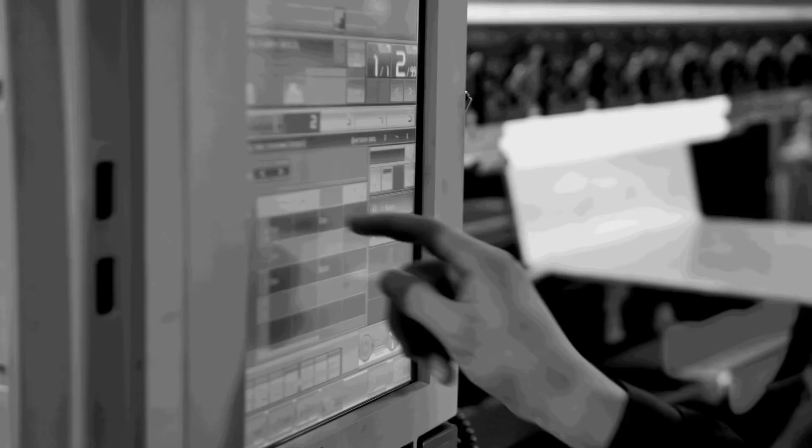Today's technical corner. If I said to you I could improve material removal rates, reduce your cycle time and reduce the number of operations, you'd be interested. Well, today we're joined by Matt Kavanagh from MSC Industrial Supplies.

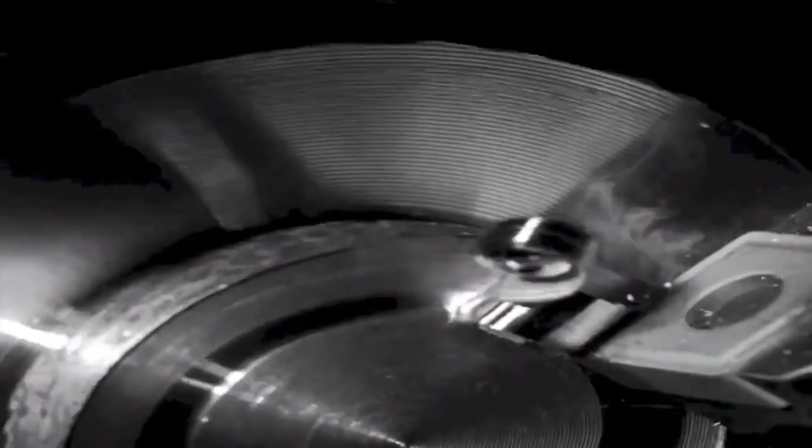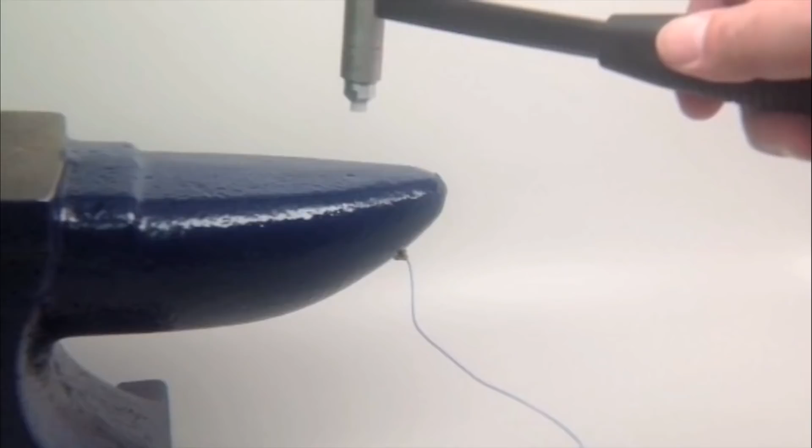We don't make milling machines, milling tools, or milling software. We just make them all mill better. Here's how. Unlike other machining operations where the cutting edge never leaves the workpiece, milling has hundreds of individual tooth impacts per second, generating forces that cause deflection and vibrations. Like this 75-pound anvil, every tool is flexible and vibrates at its own unique frequency. Why is this important? The tool point deflects and rebounds at a frequency determined by the flexibility of the tool holder and spindle. You also have a tooth impact frequency determined by the number of teeth and spindle speed.

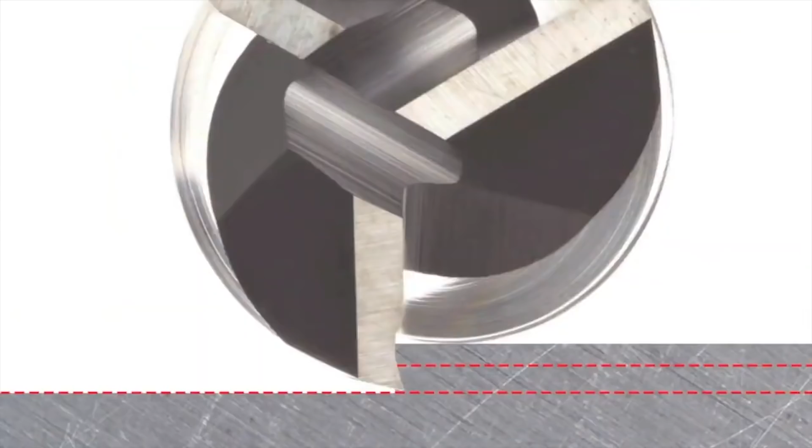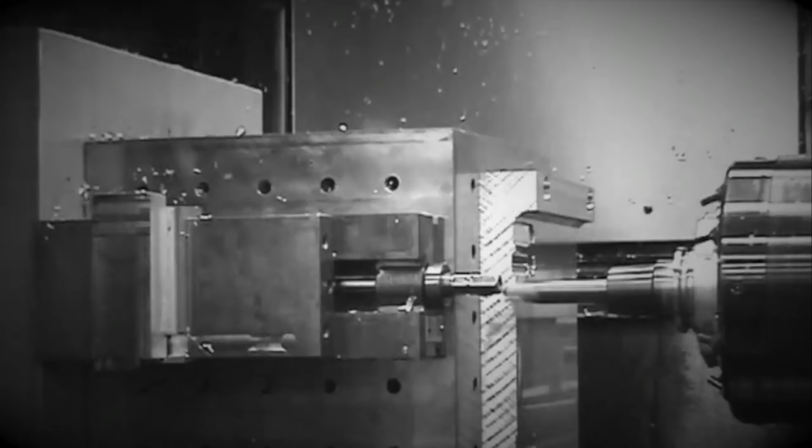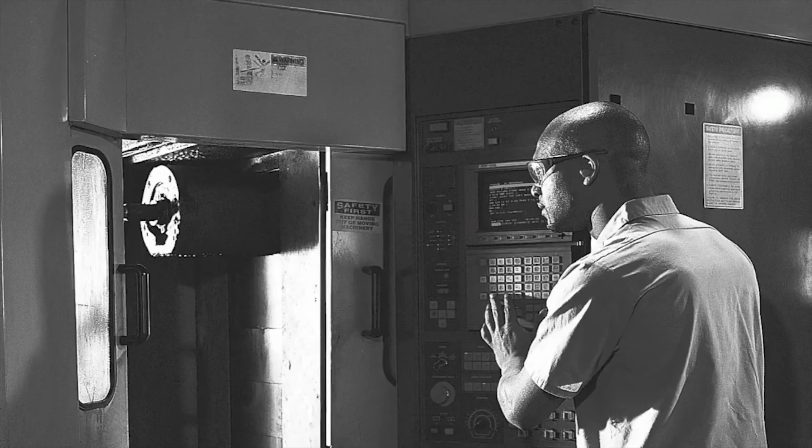You have to get the timing of these two frequencies just right. If you do, each tooth is cutting equally, so tool life, productivity and quality are maximised. If the timing is off, a tooth arrives too early, undercutting and throwing off the next tooth. If it arrives too late, exceeding the programmed chip thickness, it leads to premature tool failure, poor surface finishes and possibly scrap. This timing mismatch keeps getting worse and leads to chatter. Without knowing the tool's frequency, the common response to chatter is to slow down the spindle speed, vastly underutilising the capabilities of your machine and tooling.

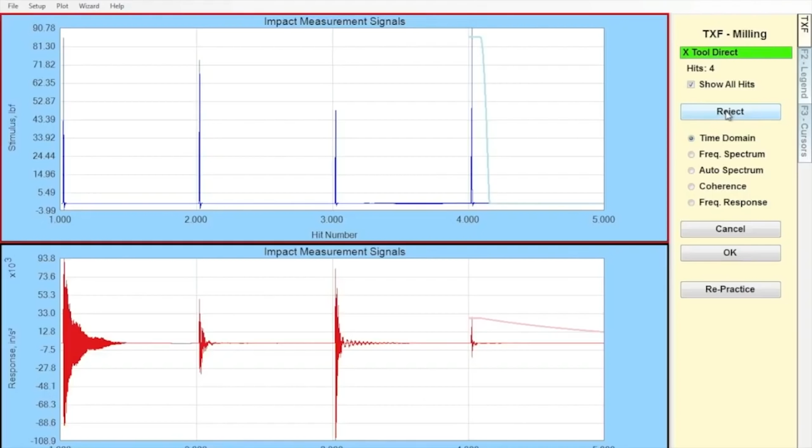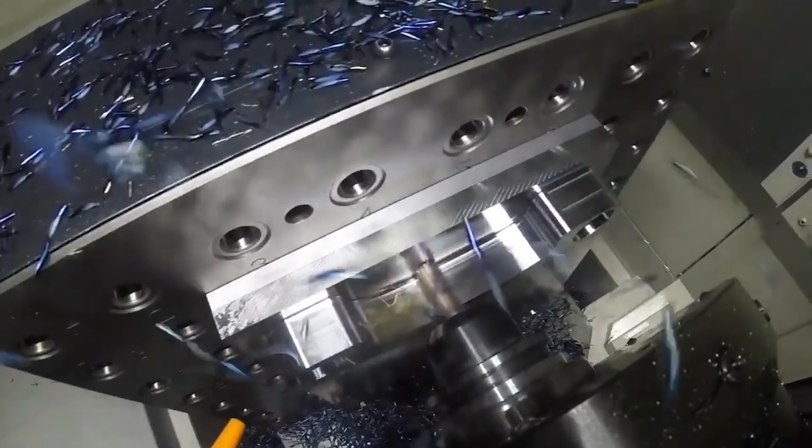As we said earlier, every different tool, tool holder, machine combination vibrates at its own unique frequency. The challenge is that there are millions of potential combinations. MSC MillMax measures the frequency of each tool and instantly generates a dashboard that calculates the precise, stable speed and feed rate, width and depth of cut for maximum performance. It also determines the best speeds for surface finish and accuracy. This patented and proven technology is in use in the world's largest manufacturers and is available exclusively from MSC's engineering team. Contact MSC today.

Wow, Matt, it's only a 2-minute video, but that is absolutely amazing. But I want to put you to the test. Have you actually got a real life example for us? Yeah, for sure. So we took this software over to a supplier, manufacturer of tooling and supplier. So when we went there, they had a piece of... I'm going to stop you there. Let's actually see the video first, shall we? Okay, yeah, let's do that.

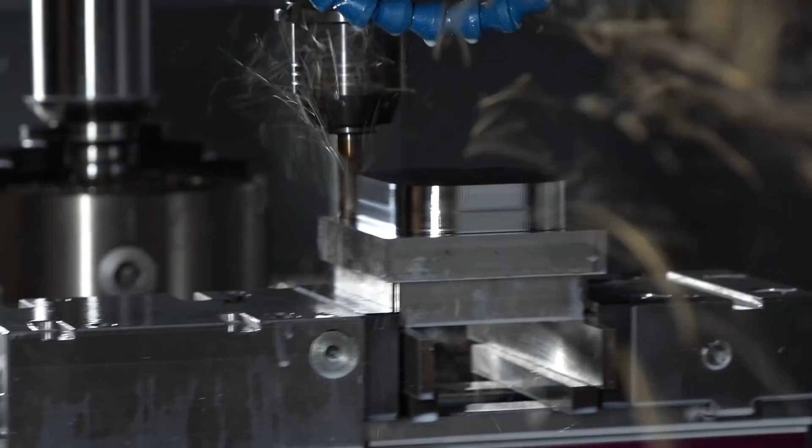So Matt, talk me through what's gone on here then, please. Yeah, so as I say, we went on site to a supplier. They helped us out with the material and the tool setup. We went in, we put all the data into the software, tapped the test, and we got over and above beyond where they'd managed their optimum performance. Bearing in mind this supplier, they use their tools, they trial and test, they have internal conversations, they work with their customers, and throughout a 2-year period the supplier got the optimized data of what they thought.

Within 15 minutes we actually gave them over and above what they thought was the optimum data, and we'd almost doubled the output of their optimum performance. So you've walked out with a big smile. They've walked out for sure. Yeah, brilliant. I mean, it was all over internally on their internal work.

Absolutely fantastic story there. So I want to take a step back then, and the start of this sort of process is sort of the bane of engineers, and that's your chatter. We've got a great example of a video after this. We'll go into that.

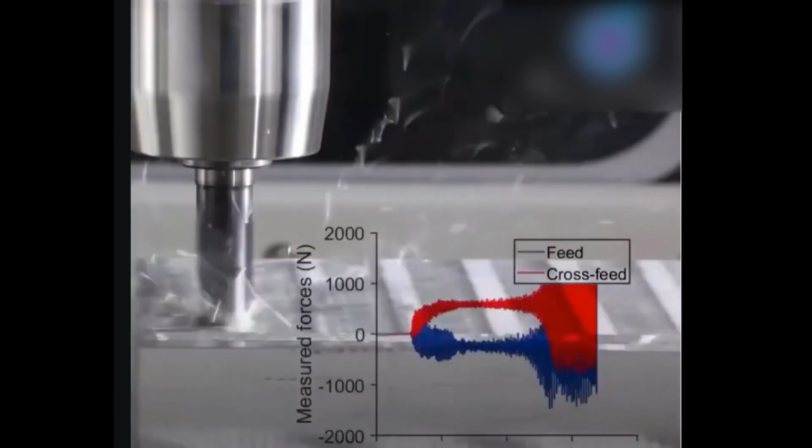Okay, tell me what's gone on here then, please, Matt. So yeah, you can hear the chatter on there audibly. What's actually happening is, crudely, the actual tool's wobbling, so it's got resonance in there, and you can hear that chatter and that movement as it's machining. And every setup has its own resonance, its own thumbprint, essentially. For sure. Okay, but we'll come to that in a little while.

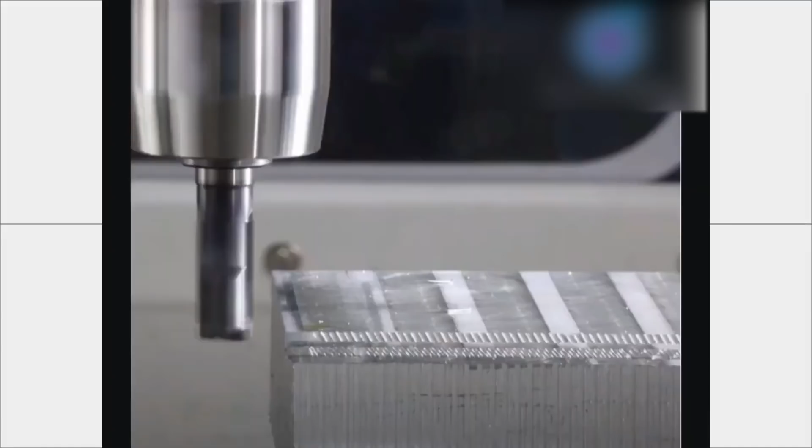So that's pre-MillMax, post-MillMax. I think this tells the whole story. So now, could you hear that? Absolutely, you couldn't hear it. I mean, that was like a knife through butter. It really was. So what's happened here though? So what we've done is we've actually found, I always refer it back to a hearing aid. It's about that person's frequency, and it's unique to them. Same characteristics here. It's the right frequency, or the stable frequency, regarding the characteristics of the actual setup.

Okay, well that ties in perfectly with what I want to cover next, which is the actual setup. So you've got here the mill. Obviously, we haven't got a machine and a spindle, but you've got the tool holder. Talk me through what's going to go on and how it ties in with the resonance. Yeah, for sure. So here we've got, let's say, a machine on concrete, or it might be on anti-vibration pads. We've got the build-up of the linear rails. We've got the spindle, and all of these elements offer a certain resonance.

When you then add the complications of the actual tool and the tool holder and the tool assembly, or any adapters, you're then building up the frequency levels a hell of a lot more than what it would be previously. So it's about then finding that unique stability, or eliminating that resonance, to be able to pinpoint where you should be machining. Okay. Eliminating the resonance or identifying the resonance? I think both, actually. Okay. So we'll see that on the dashboard.

Okay, so essentially every single setup is unique pretty much. So you've got that setup, you've got chatter occurring. I've contacted yourself at MSC, said I need you guys to come out and get the MillMax and do the tap test. So what happens? So yeah, before we even come on site, we'll have a look at some characteristics of your machine setup. So we'll want to know the machine itself. A picture tells 1,000 words of a tool setup, so that would be great.

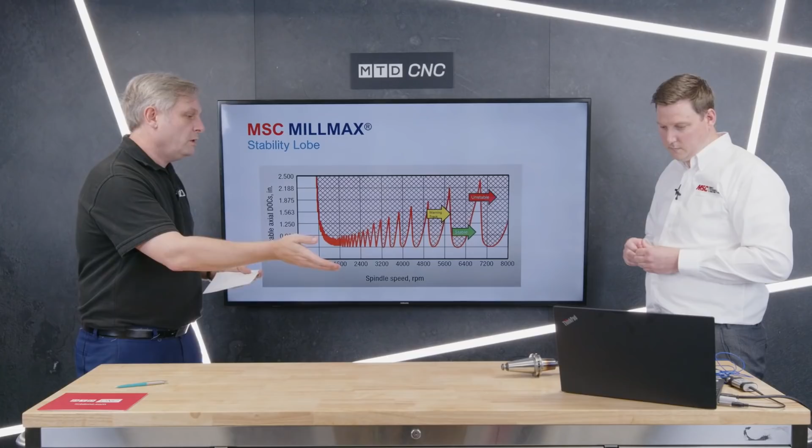Yeah, so essentially we've got the tool holder with the tool, which will be static in the machine. So it's not rotating at this point. We have a 3D vibration sensor with some jelly, very technical. Some petroleum jelly that sticks it onto the flute of the tool. That will stay there throughout the whole duration of the tap test. Okay. Obviously, the spindle still isn't rotating through the duration of the tap.

Then, whilst that 3D vibration sensor is stuck onto the tool, we have a hammer which we will tap onto the tool. No, it's not a hammer though, is it? We'll call it an accelerometer. Yeah, I've got to get that right. So we will tap the tool, and once we tap that, the software will tell us whether it's doing a double tap, you've tapped too hard, you've tapped too soft. So it is very sensitive to make sure that you get the right information back into the software.

Okay, so you're doing all this setup. I mean, you've got the data in advance, you're doing all this setup. I'm a machine shop, I need to be making components, making money. My machine shop's going to be down for the day. So no, completely incorrect there, actually, Colin. What we do, because we're doing all that back work, and because we're taking all that data, we'll input that into the software already. Right.

So we'll literally use that vibration sensor, put it onto the tool, onto a static tool, tap the actual tool itself. There's a number of taps we do in one direction on the axis. We turn it around, do the same amount of taps in the other axis in Y and X. And then once we've done that, we've got all the data, we can come away, analyse it. You could even carry on with your production, and then we can give the optimised data after, so it will eliminate the downtime. Okay, so roughly, what, 15 minutes? 15 minutes, yeah, for sure. So that's brilliant.

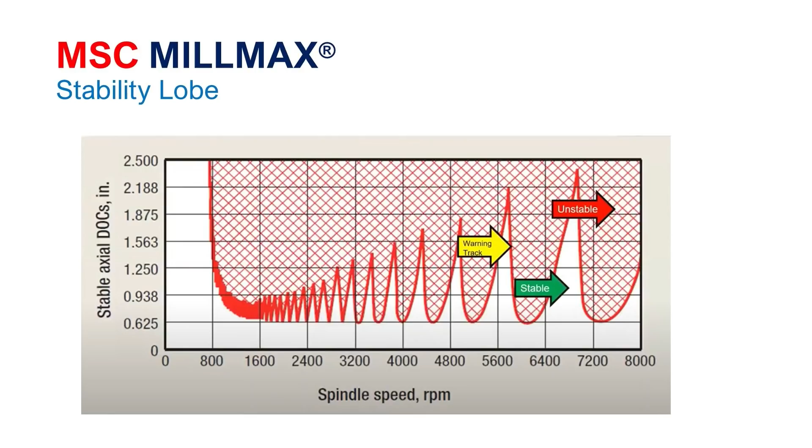Okay, so you've got the data for that setup, for that machine, the tool holder, the tooling. You've done your tap, then get the stability lobe, which you'll talk us through. Yeah, so the white parts in there are the depth of the tool that's engaging into the material. So in between these peaks and troughs, between the red and the white parts, you can see at the bottom the actual spindle RPM. And then on the other axis, you can see the depth of cut. So depth of cut here, spindle speed there, and that's individual to each machine. So it could be 12,000, 15. Yeah, it's unique to whatever max RPM the machine's got.

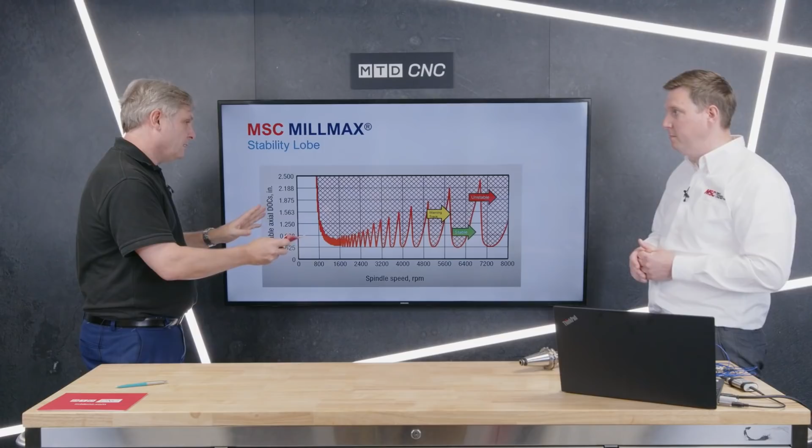And then within the white areas are the stability parts. And then you've got this thick red line that comes around there, which is a warning, so unstable. And then the crosshatch, unstable, chatter, avoid like the plague. Okay, so red, amber, green, it's nice and simple. I want to be machining in the white bit, but the most optimum white bit, essentially. For sure. So for the engineers, this data's great, but they want to see something more usable that they could tie in. So that ties in nicely with our next slide, which is the dashboard. So the stability lobe, once you've done your tap test, moves into that.

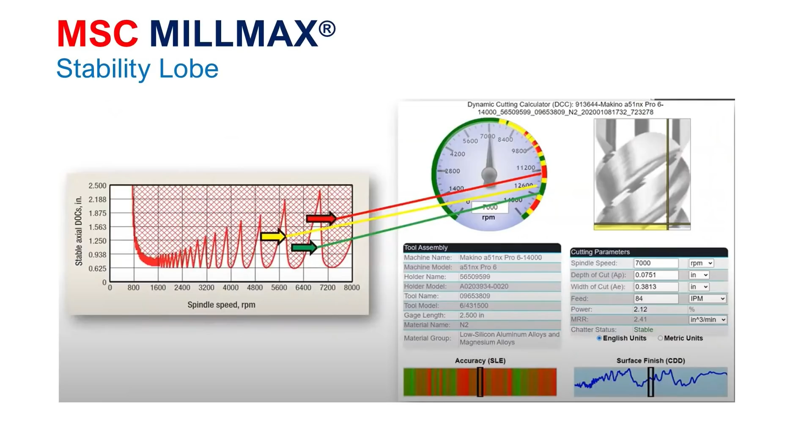On the right hand side of the screen here, we can actually see what the customer would see, and we can give a sample to the customer of what we've tapped. So again, just like what we talked about with the stability lobe, we've got the green, amber, red traffic light system. Within there, you can look at the different defining moments in this data, which is the depth of cut and the width of cut, where that stability part is unique to that material engagement.

I'm going to stop you there, because what we alluded to earlier was trial and testing, changing the speed. Before, an engineer might have gone up to 7,000 and then backed off a bit, but you're telling me they could have been machining up at 12,000, 14,000 potentially to get that.

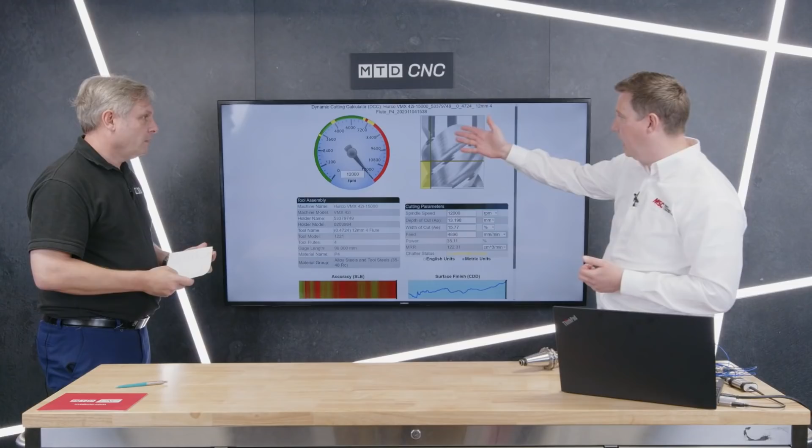Yeah, for sure. There are cases where, in this instance, you might go at 6,000 RPM. It's interactive, so we'll come to that in a moment. You might increase the feed and hear chatter, and think, I don't want to go any further, so you come straight back to where the stability is - time to break the machine, with loads of operators looking at me. Little did they know, maybe at 1,000, 2,000, 2,500 RPM there was a stability area you wouldn't get to, unless you're really trying to define it.

So if I can increase that, what results will I get? Material removal rate - yeah, you're going to increase material removal rate for sure, decrease the cost per part, and prolong the actual tool life itself. Most importantly, you're not only looking after the actual tool to get the maximum out of the procured item, but you're looking after the capital investment of the machine, because don't forget, all those vibrations are emitted directly into the spindle as well - the spindle bearings, the lifetime of those bearings are going to disintegrate, and you really want to capitalize on the effectiveness of your machine tool.

You've got to have this solution. It really sounds like you have to do that. So taking a step back, we've got the interactive software, which we're going to get back up on the screen now, because it is interactive.

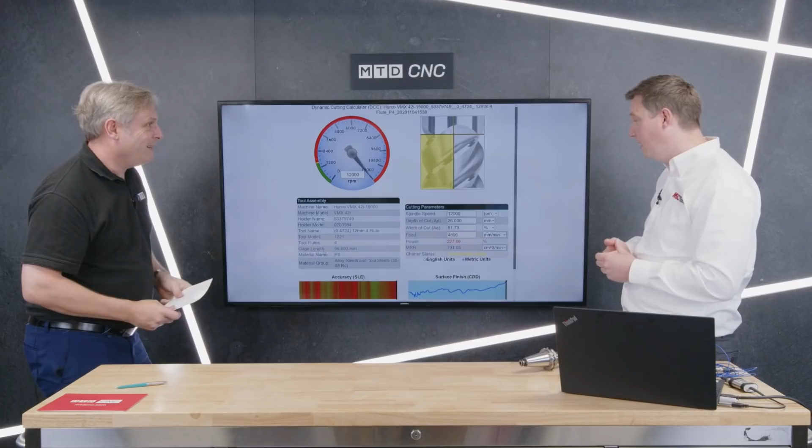So you've got your radial and your axial cuts here, you can move it around. Talk me through it, please. Yeah, sure, there's loads of different ways to explain it. We've got the AP and AE, what engineers typically all know and use - the axial depth of cut and the width of cut, which is the AP and the AE.

First of all, on the actual dashboard, it's kind of like a rev counter on your car - it tells you the maximum RPM on that spindle. So 12,000 on a Hurco machine in this instance. And if it was a Hurco with 15,000, then it would show 15,000. Any maximum machine RPM, any milling machine. What we also put in there is it's governed by the actual kilowatts as well, so we actually put the actual torque load into the software itself.

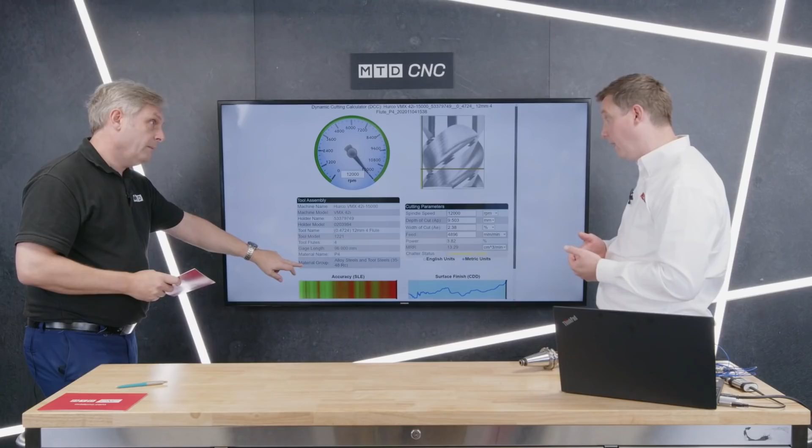Once we've got all the parameters, we've got the material as well - so material group down here. Yeah, for sure, whether that's P1, P2, Inconel, titanium, austenitic stainless, plastics, composites - because the tool still vibrates. It's not so much the workpiece in that scenario, but because you're looking at that material, it will give you the quadrants that will work with the material.

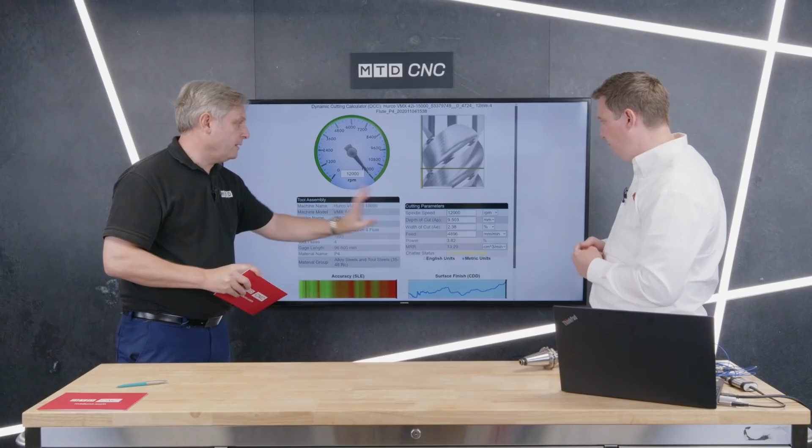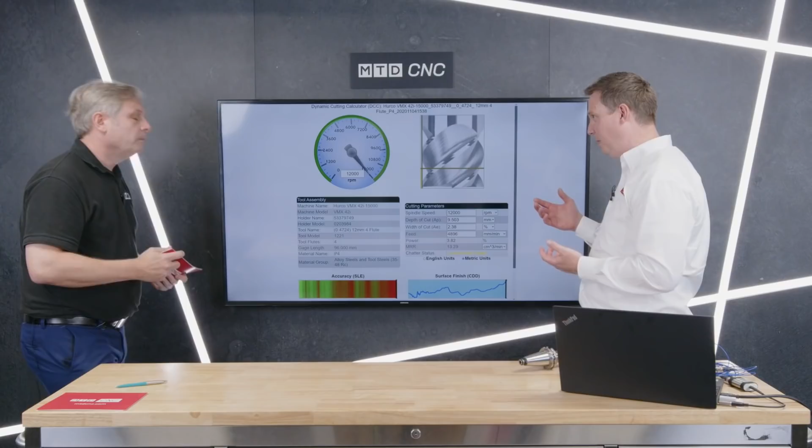So you've got your set data there, and then you get to play around with that. It's not very technical, but on this side, essentially, yeah it is. I suppose this is the fun part for any engineer, because you're not only looking at where the stability is, but actually trying to define what kind of strategy to look at and play with. So if you've got the crosshairs here, the yellow part here is the actual engagement of where the tool's cutting the material.

So you can get the crosshair and move it over to the far right, and you can see straight away that we've got a load of instabilities and chatter. So here, essentially, a massive depth of cut, massive depth and radial. So you can't push it too hard.

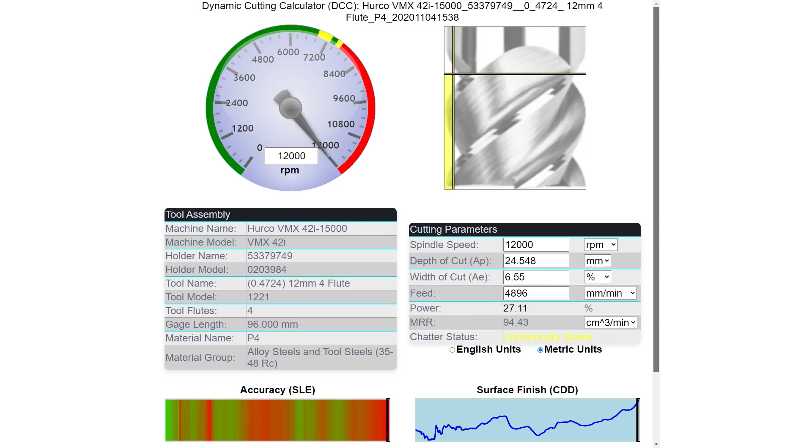But if you bring it down to here, right the way down, you've got stability. But if you actually bring it, still in the same quadrant, but bring the tool length all the way to the top, you can see now. And if you move it towards the left-hand side to reduce that material, you can see we're starting to get little parts of stability. Then you can start moving the length a little bit further down, and you can see little parts of stability starting to open up. So you can really have a play with how you use the strategy.

And then you can use this here, but then you can also type it in here. You can actually define values. So if you've got 12.356, you won't necessarily program in that way. You'd try and round it up to make the data a little bit more stable. So that'll be here, for example.

So the depth of cut, you can go on there and change that to 18 mil or something, for argument's sake, and as if by magic, there you go. And then the next one down for the width of cut.

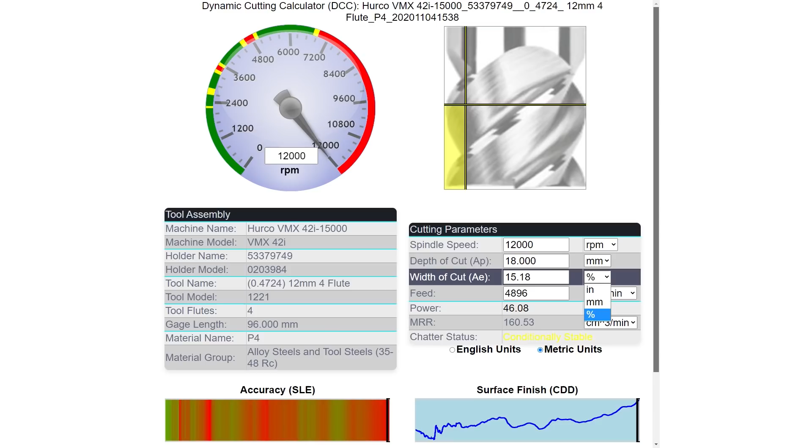In fact, you can actually change on the right hand side where you've got percentage, to millimeters or the percentage engagement, which is great for trochoidal machining when you look at 10%, 15%, 12% engagement, whatever it may be.

So ultimately, you've got this - you've done your tap test, you've got this dashboard, and you can change how you want to do your cuts and things like that. Then you're going to get, as we mentioned earlier, improved material removal rates and cycle times. But you can vary the application in terms of the strategy.

So you can have longer tool life or better surface finish. We saw a video earlier where we talked about the Dormer, and you could possibly see some of the imperfections on the material. That's purely because what we want to try and do is look at whether you can run a tool stable but with a really high metal removal rate.

But when you want to start looking at the actual surface finish for thin wall machining, you can actually utilize the software to look at the accuracy expectations and the surface finish.

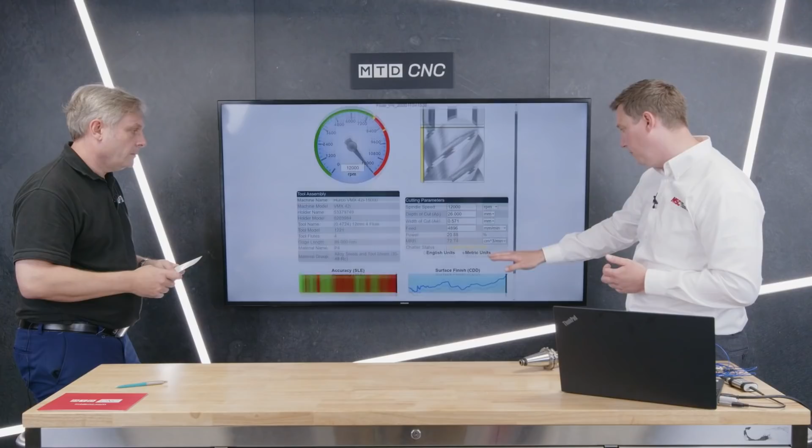So when you see the dashboard again, at the bottom of the screen, you'll actually see where you can get surface finish. If we go back to the dashboard, and look further on down, you can see a graph there where the lower that structured line is, the better the surface finish.

So I'm thinking if you're going for a better surface finish, you can maybe remove other operations such as your grinding or polishing, depending on the actual machine itself.

So this again, we talked about MSC's engineering capability. This is great, having the software and knowing where the stability is, but actually understanding what you can physically do on the machines and its capabilities is another thing in itself.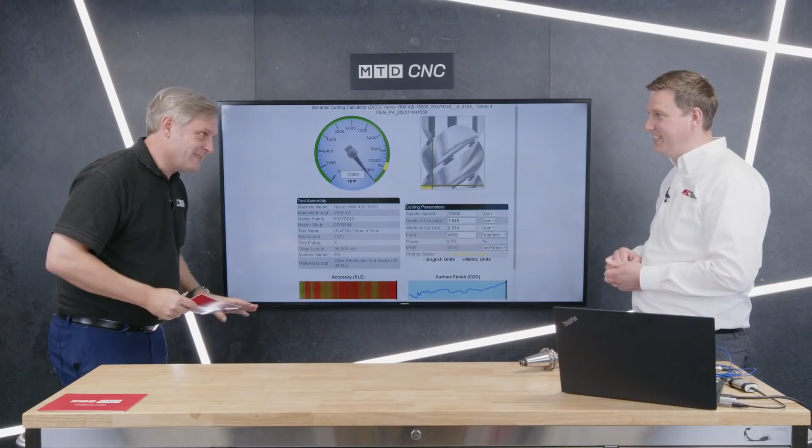Okay Matt, absolutely fantastic product, service, the MillMax and MSC, it really is. As we've been going along I've been thinking of questions, and there's going to be loads more questions out there. So I'm hoping you'll get inundated, not too many, too tricky, but I think we alluded to it - this will be any setup, so machine, etc.

Yeah, so any tool from indexable, high-speed steel, carbide, cobalt, single point boring bar, live tooling on a lathe. So anything that's rotating, we can tap.

Okay, and I think we've covered this already, but just to reiterate, how long to actually do this? 15 minutes. Purely because we're taking all of that data before we even get on the shop floor, and then analysing the data, the customer's back in production.

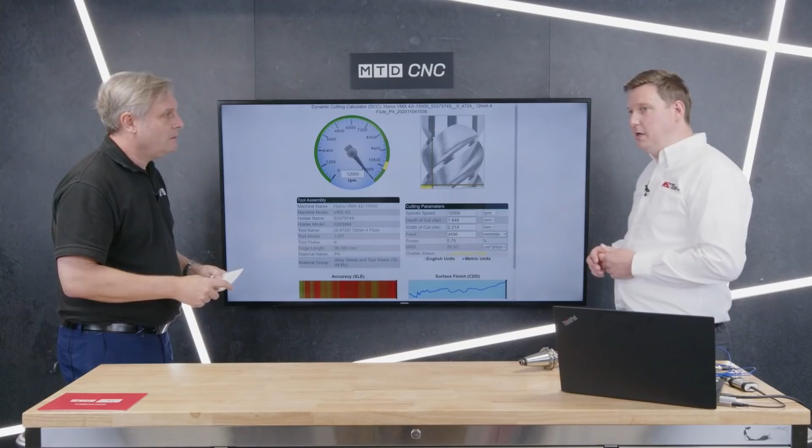Now, you said pretty much any type of tool, any sizes? Yeah, so obviously we're using the accelerometer to actually tap the tool, so I'd say anything from 8 mil up to 150 mil. And then obviously at 150 mil, what we do is put a weight on the actual hammer, because we still need to try and get the resonance back through the accelerometer.

You should do our marketing. Okay, that's it in a nutshell. So that's just a couple of questions.

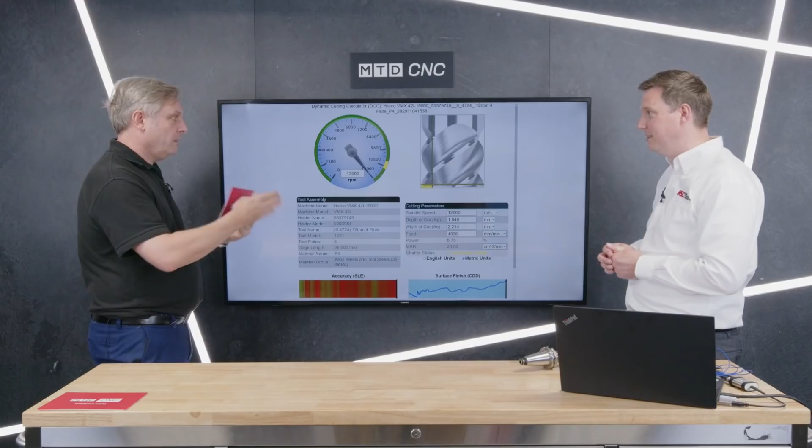I want to speak more generically about this, looking at that side of things, but how's it going to affect your machine shop? Yeah, I mean, it's quite a big question, Colin, because you've got everything coming back from reshoring now. So people want to take back the work, they've already got work going on at the moment, they've got headcounts coming back from furlough as well, which is more added pressure. They've got to buy the material, they've got to buy all the production elements to it. Trying to add all that in and get efficiency out the shop floor, to get sales generated as quick as possible. What we need to do is get stability and certainty within our shop floor, and it's key to get the data right.

As long as you've got the data right, and as long as you've got best practice, you can utilize it, and with MillMax, when you've got that optimized data, you can use it within your shop floor to make sure you've got effectiveness throughout each operation. So in a nutshell, it makes things far more efficient. You can, it's making sure you've got the metal removal right, the cost per part right, you're quoting more efficiently. If you're quoting more efficiently, you can get more retention from the customers you've got, you can beat the competition, you can increase lifetime agreements with certain parts. Maybe you give a little bit of margin away to retain a little, but it's all about how you support the shop floor.